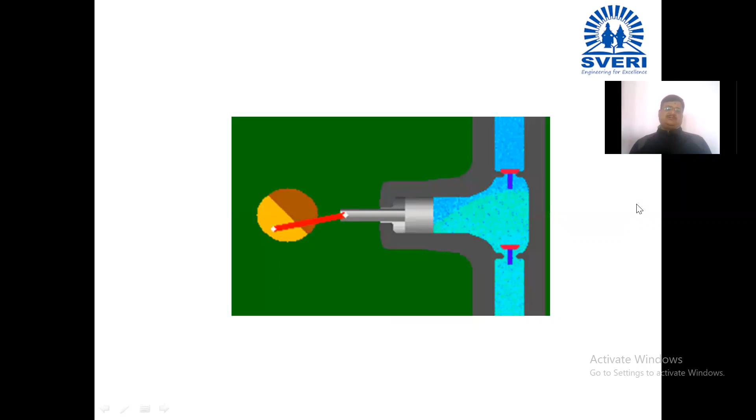In this unit 5, in the previous lecture we studied the single acting reciprocating pump. The diagram for this single acting reciprocating pump is in front of you. This was the block diagram. We have seen its working, shown also in the form of this animation.

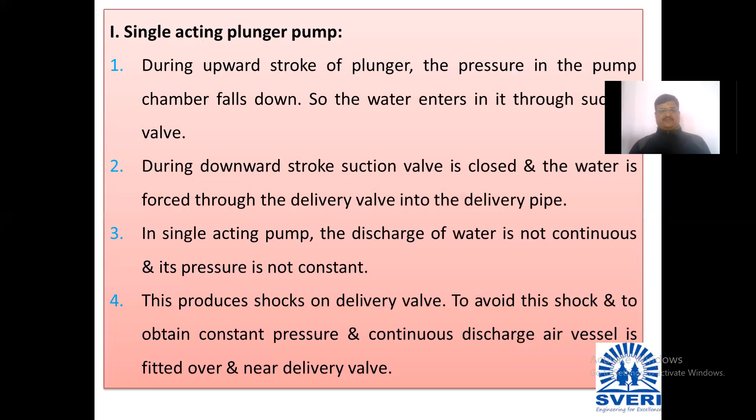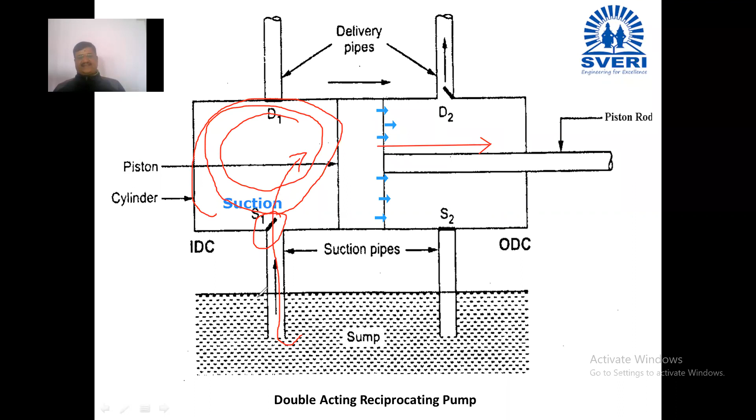S1 valve जो काही आहे तो ओपन होतो आणि त्याच वेळी सक्शन असल्या कारणानं D1 valve क्लोज होतो. Due to this suction, vacuum is generated and the liquid from the sump is taken inside, like single acting reciprocating pump. काय होतं?

ह्याच्यामध्ये संप मधून जे काही लिक्विड आहे ते आतमध्ये घेतलं जातं, ज्यावेळी तुमचं पिस्टन लेफ्ट टू राईट मूव्ह होतं. Means when your connecting pin is moving from IDC to ODC, piston is moving in the backward direction, suction stroke is carried out.

This is during the first stroke or suction stroke when your piston will move in a backward direction. मग बॅकवर्डला पिस्टन आल्यानंतर तो नंतर ओडीसी कडून आयडीसी कडे, आउटर डेड सेंटर कडून इनर डेड सेंटर कडे मूव्ह होणार आहे. Means your piston will start moving in a forward direction.

When your piston is going to start moving in forward direction, vacuum is going to be generated at the right hand side, and S2 valve will get open. D2 valve is going to close. S1 valve is going to close and D1 valve is going to get open.

आता पहा ज्यावेळी पिस्टन पुढे मूव्ह होतो तिथं आधीच लिक्विड भरून ठेवलेलं आहे ड्युरिंग सक्शन स्ट्रोक. Then piston is going to add energy to the liquid which is already there in this part of the cylinder.

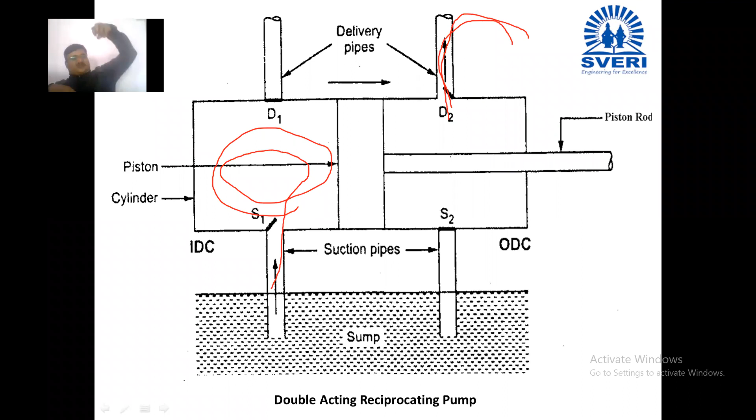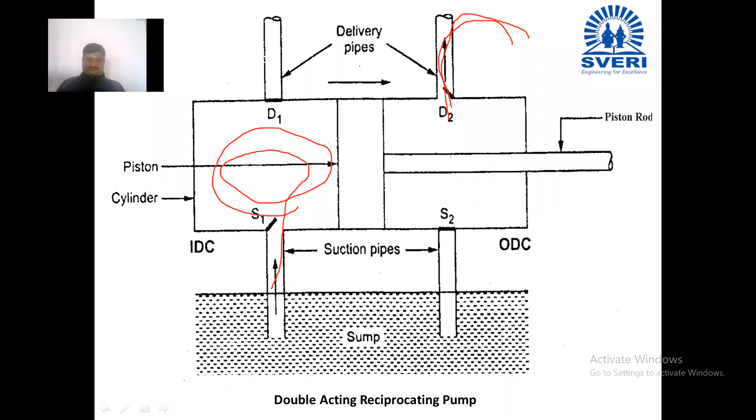But here in case of the double acting reciprocating pump, suction is also happening and simultaneously delivery is happening at another end, and the same process is repeated for the second pipe. म्हणजे एकाच वेळी सक्शन होतं एका भागामध्ये आणि दुसऱ्या भागातलं लिक्विड पिस्टनच्या बाहेर टाकलं जातं.

सिमिलरली ज्यावेळी पुढचा स्ट्रोक येतो त्यावेळी एका बाजूनं लिक्विड जे घेतलेलं आहे ते दुसऱ्या बाजूनं बाहेर टाकलं जातं. आणि लिक्विड आतमध्ये घेणं आणि बाहेर सोडणं हे क्रॉस मध्ये चालतं.

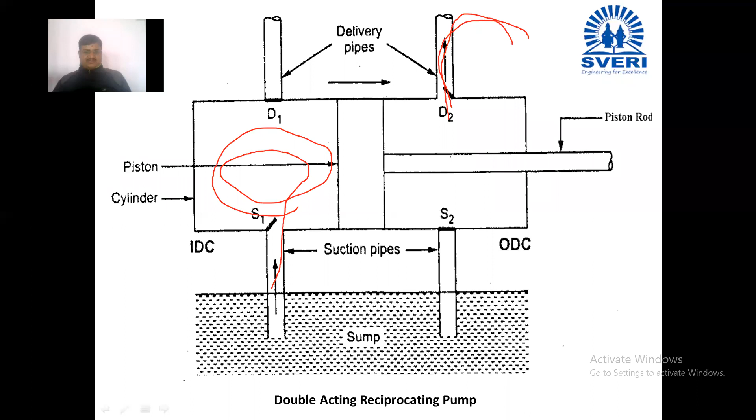Means when your S1 is open, your S2 is closed and D2 is going to get open. And when your S2 is going to get open, then your D1 will open. Now here you can see that S1 and D2 are open.

म्हणजे एका बाजूला सक्शन होतंय तर दुसऱ्या बाजूमधून लिक्विड बाहेर काढलं जातं. आणि इकडच्या बाजूला ज्यावेळी हा स्ट्रोक फॉरवर्ड डायरेक्शन मध्ये जाईल त्यावेळी S2 valve is getting open and similarly D1 valve is also getting open. At that time S1 valve will be closed and D2 valve is also going to be closed.

म्हणजे क्रॉस मध्ये जे काही वॉल्स आहेत हे उघडतात आणि continuously high pressurized liquid supply we can get by using this double acting reciprocating pump.

Now what is the basic difference between single acting reciprocating pump and double acting reciprocating pump? Can anybody tell me what is the basic difference between them?

In construction, double suction pipes and delivery pipes are used. Two suction only pipes and two delivery pipes are used. Okay, yes, good. Can anybody tell me what is the valve situation during suction and delivery stroke of the piston?

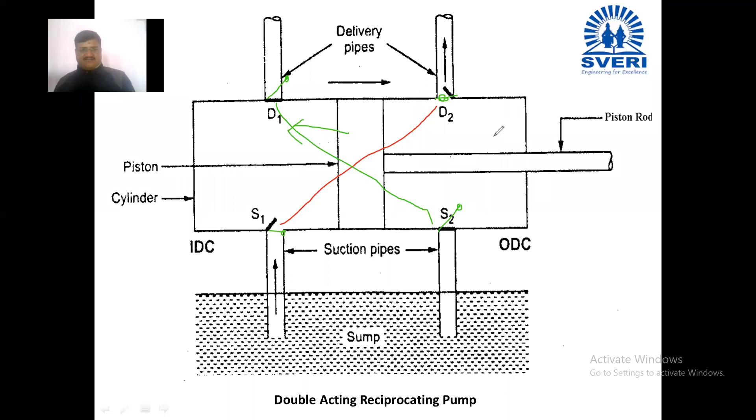So the construction is understood by you and its working is also understood. Simple working is there. Here at both sides of the piston, meaning left side as well as right side of the piston in the cylinder,

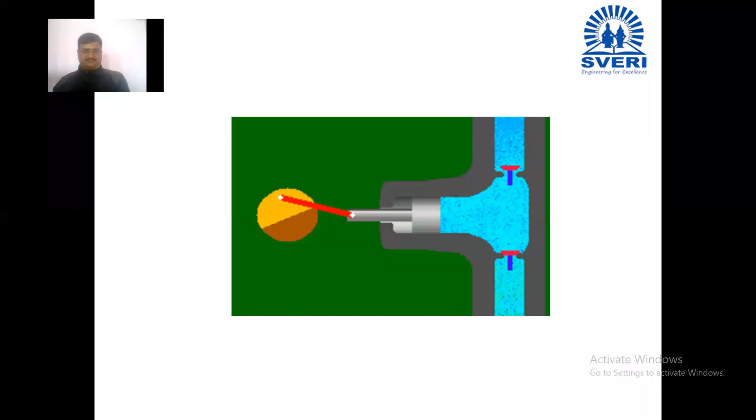You just see - in case of the single acting reciprocating pump, here the liquid is taken only at one side. If you see, you will come to know that in this diagram, liquid comes from here up to this point and again goes out from here. So to the right side of the piston, there is no liquid.

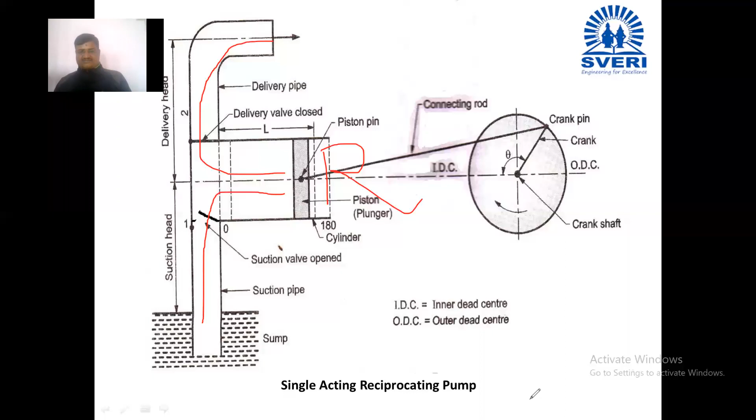But in case of this double acting reciprocating pump, you can see at both sides of the piston, that is in the left hand side and in the right hand side, you can take the liquid inside and you can deliver it to the outside.

Okay, yes. So just we are going to concentrate on the application of this particular double acting reciprocating pump. I can tell you the speciality of the reciprocating pump - they can provide the liquid at another end with higher pressure.

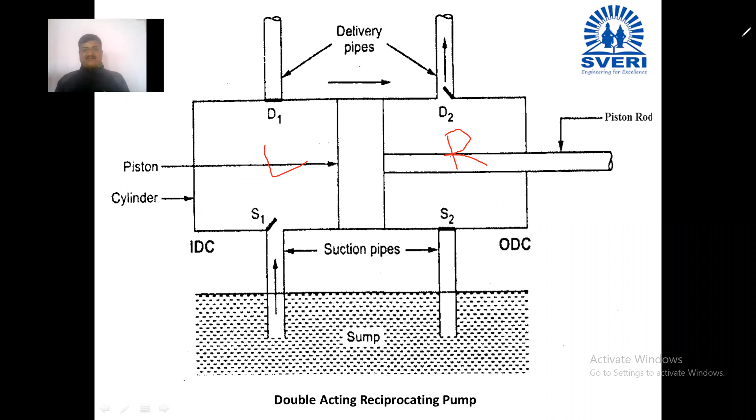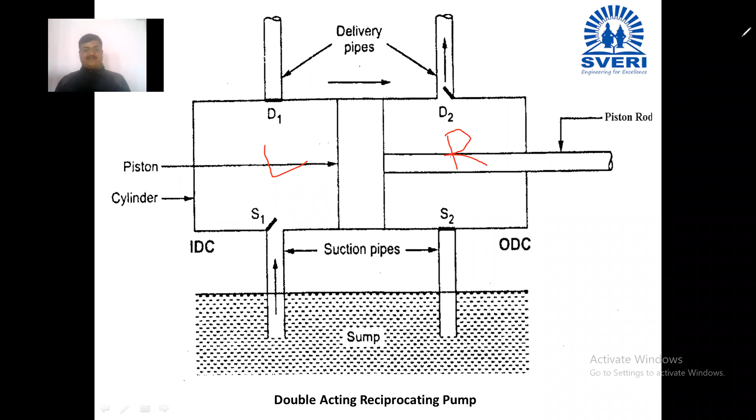We are going to concentrate on the double acting reciprocating pump, but before that, please draw this diagram of the double acting reciprocating pump in your notebook. This diagram of the double acting reciprocating pump, copy it into your notebook. Simple diagram. Okay, your time starts now. Are you ready? Are you drawing it?

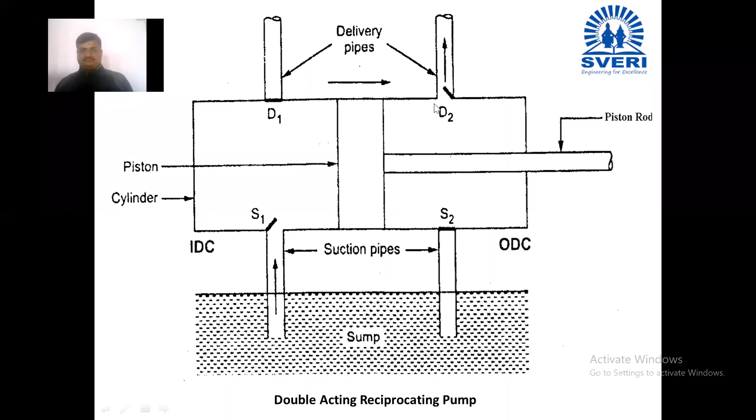Have you completed it? Yes sir, yes sir, yes sir. So the application of the reciprocating pump is the next part of our discussion.

Reciprocating pumps are there, but where do we need to use it? So here the answer is given - the reciprocating pumps are widely used for very high pressure head of the water.

You want your water with higher pressure - I need more pressure for the water, meaning it can go to a larger distance. At that time, such reciprocating pumps are widely used, when I need high pressure liquid, water, at that time I will use the reciprocating pump.

Because you must know that this is a pump, I have studied it, what a reciprocating pump is, how it functions, how single acting works, how double acting works. I know everything, but where do I need to apply it?

So you need to apply the reciprocating pump where you require high pressure. Then, though they are providing high pressure, they are giving small discharge.

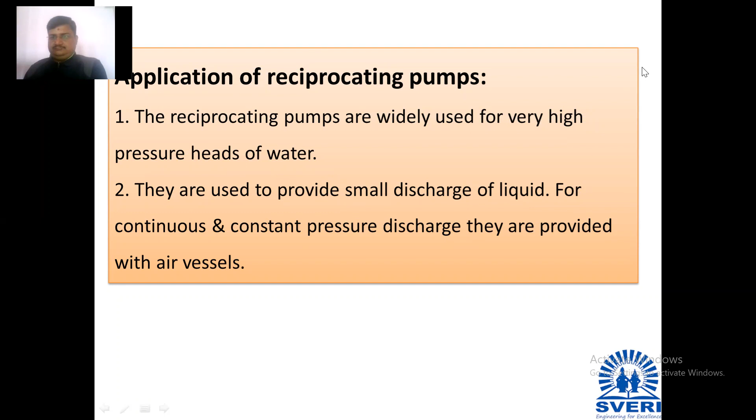Now, the next type of pump is the variety of rotodynamic pump. And in rotodynamic pump, there are two types. Which are those two types? Can anybody tell me? Rotodynamic pump - radial flow pump and axial flow pump. Yes, radial type flow pump and axial type flow pump. And this centrifugal pump is an example of radial type of flow pump.

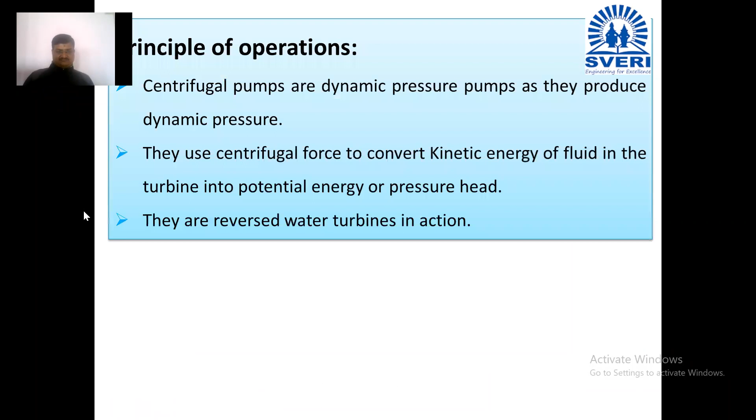जेव्हा इम्पेलर फिरतो, सेंट्रिफ्युगल फोर्सच्या कारणाने सेंटरला जोडलेला पाईप, जो इम्पेलरच्या आयला जोडलेला असतो (आय म्हणजे डोळा, इम्पेलरला एक आय असते), त्या ठिकाणी व्हॅक्यूम जनरेट होतं, आणि संपमधलं लिक्विड ती व्हॅक्यूमची स्पेस ऑक्युपाय करण्यासाठी वर वर पाईपकडे चढत जातं.

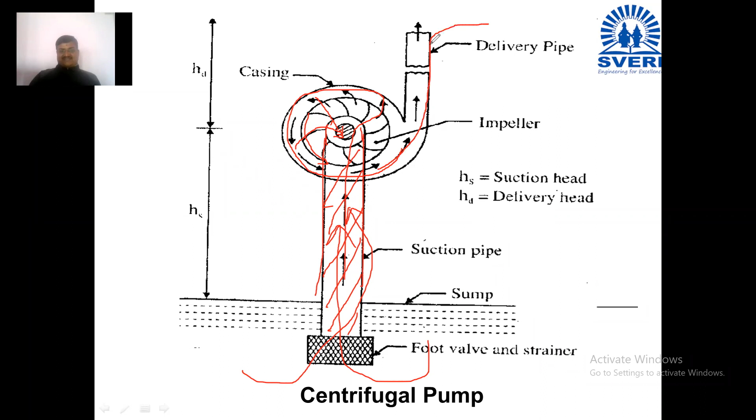ते पाईपमधून इम्पेलरकडे येतं, आणि इम्पेलरच्या व्हेनमधून ते पाणी बाहेर टाकलं जातं. बाहेर टाकत असताना ते सर्क्युलर मोशनमध्ये कायनेटिक एनर्जी घेऊन बाहेर पडतं, त्याला डायरेक्शन दिली जाते आणि डिलिव्हरी पाईपमधून ते पाणी बाहेर पडतं. अशा पद्धतीने सेंट्रिफ्युगल पंपचं मेकॅनिझम वर्क करत असतं.

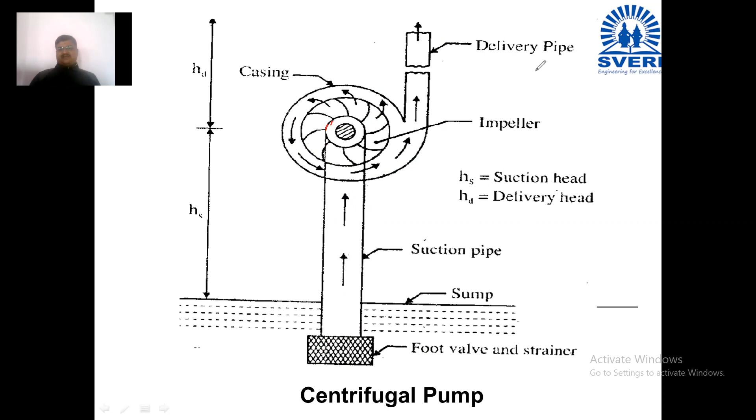But right now we are looking towards just the impeller. This impeller is fitted at the center, and this impeller generates the vacuum due to centrifugal action, and that vacuum is responsible to get the water in the suction pipe, and through the suction pipe it is reaching towards the casing. That is the work of the impeller.

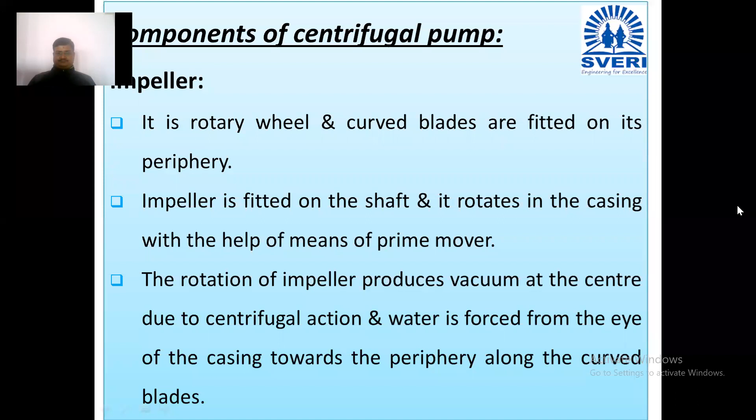Now the next part is the casing. What do you mean by casing? The shaft of the impeller is supported in the bearing provided in the casing. जे काही शाफ्ट आहे त्याला एका बेअरिंगने सपोर्ट केलेलं असतं. Have you seen the bearing? आपल्या सायकलच्या मागच्या व्हीलमध्ये बॉल्स बसवलेले असतात, तो बॉल बेअरिंगचा पार्ट.

बेअरिंग म्हणजे एक सर्क्युलर अशा पद्धतीचं अरेंजमेंट असतं. सो आय वॉन्ट टू शो यू द बेअरिंग. जस्ट अ मिनिट.

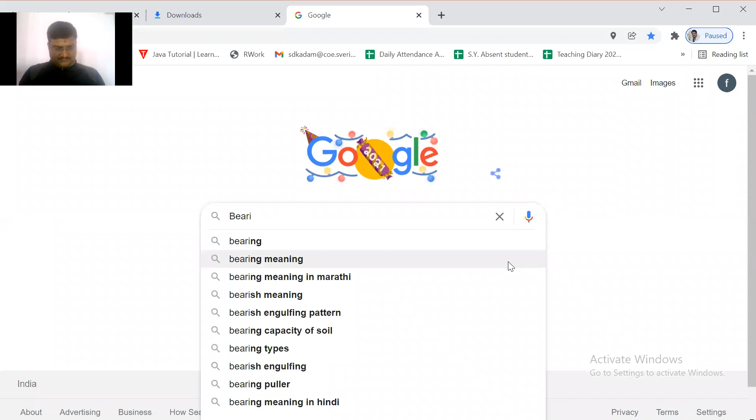So this is the bearing. Have you seen such kind of arrangement before? This is called the ball bearing. Let me show you the bigger photo. Have you seen such kind of arrangement? Yes sir, yes sir.

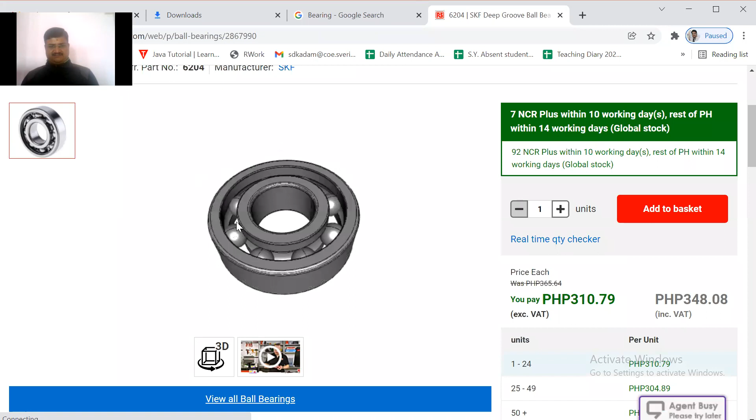तर या बेअरिंगच्या मध्ये सेंटरला शाफ्ट दाखवलेला, सेंटरला होल दाखवलेला आहे. सी दिस इज द 3 डायमेन्शनल रोटेशन्स, आणि इथं सेंटरला ही स्पेस आहे. या सेंटरच्या स्पेसमध्ये शाफ्ट टाकलेला असतो, आणि याच्यावरून बाहेरच्या पेरिफेरीवरून बेल्ट अरेंजमेंट करून हा शाफ्ट फिरवण्याची मेकॅनिझम डेव्हलप केली जाते.

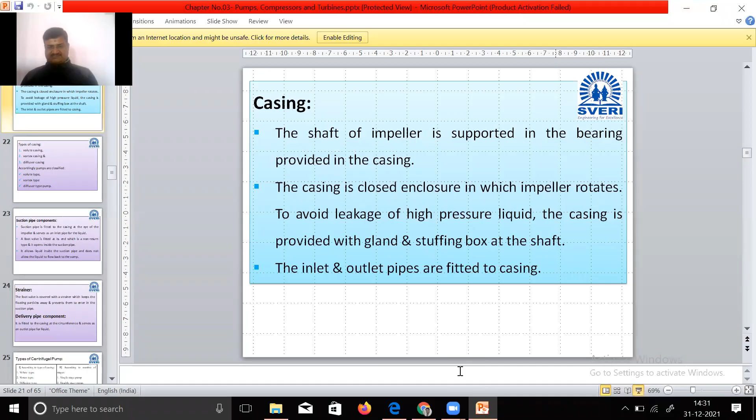सो दिस इज द बेअरिंग. ओके, just for your extra information, that part I am telling you.

And this casing is the enclosure in which the impeller rotates. थोडक्यात केसिंग म्हणजे कव्हर आहे, and inside that cover your impeller is rotating. तुम्ही बघितलेलं आहे, पंपला एक कव्हरिंग असतं, दॅट कव्हरिंग इज कॉल्ड द केसिंग. त्या कव्हरिंगला केसिंग म्हणतात.

And this particular casing is provided to avoid the leakage of high pressure liquid. नाहीतर प्रेशर ड्रॉप जनरेट होईल तिथं. जर खालून आलेलं प्रेशराइज्ड लिक्विड एका चॅनलाइज्ड क्लोज्ड वेमध्ये घेऊन गेलं नाही, तर त्या फंक्शनिंगचा काही उपयोग राहणार नाही. एवढ्या हाय प्रेशरने ते वर आणायचं आणि कव्हर नसेल, साईडने लिकेज होत असेल, तर ते प्रेशर मेंटेन होणार नाही.

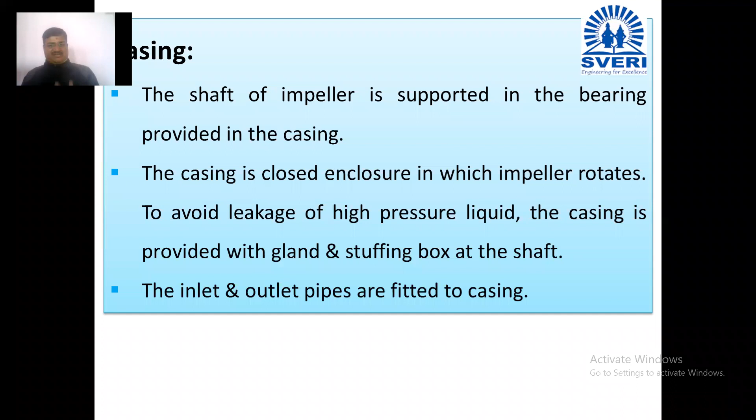So that inlet and outlet pipes we are fitting to the casing, and casing is the cover. म्हणजे केसिंगमधून लिक्विड आत किंवा बाहेर येण्यासाठी फक्त दोन मार्ग आहेत. जे पाणी आत घेण्यासाठी आहे दॅट इज नोन एज द सक्शन पाईप, आणि जे पाणी बाहेर पाठवण्यासाठी आहे दॅट इज नोन एज द डिलिव्हरी पाईप. So casing is nothing but the shell, the cover provided to the impeller mechanism of your centrifugal pump, and it avoids leakage of high pressure liquid. That part you will have to keep in mind.

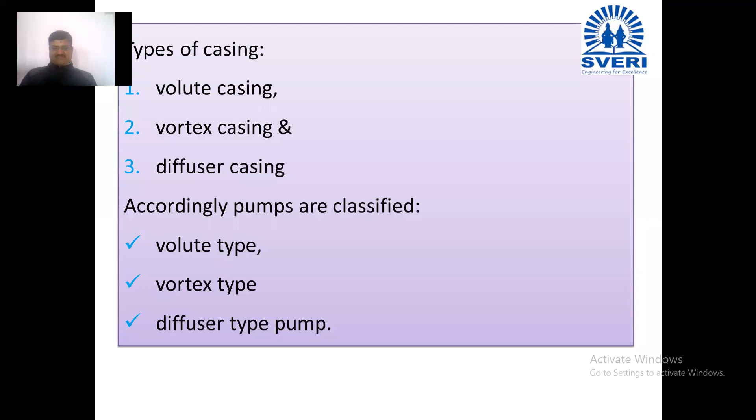Then the suction pipe component. Here in the suction pipe component, three components are there: first one is the suction pipe, second one is the foot valve, and third one is the strainer. Now you will have to tell me why the suction pipe is utilized.

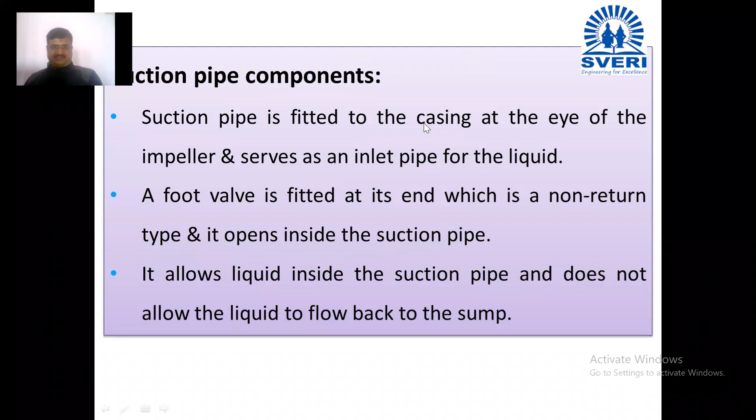So we have seen suction pipe components. Here the information about the strainer and delivery pipe is provided.

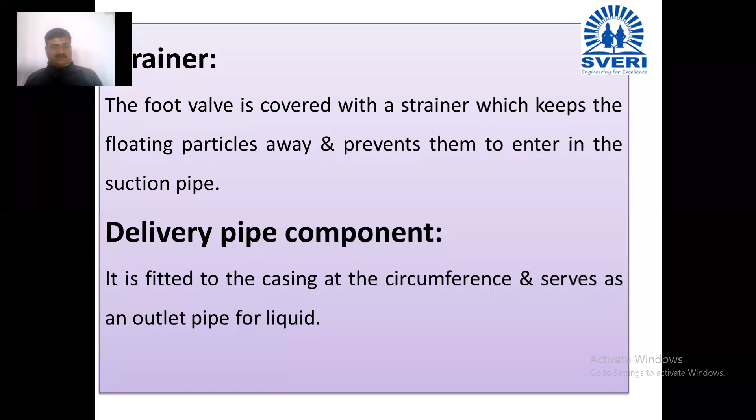There are types of centrifugal pump. I have discussed it, no need to go for further classification. Whatever classification I have given at the beginning is sufficient, but this is for your additional knowledge.

According to the type of casing, I have already discussed volute, vortex, and diffuser type centrifugal pump. And according to the number of stages, single stage, double stage - how it works is like this.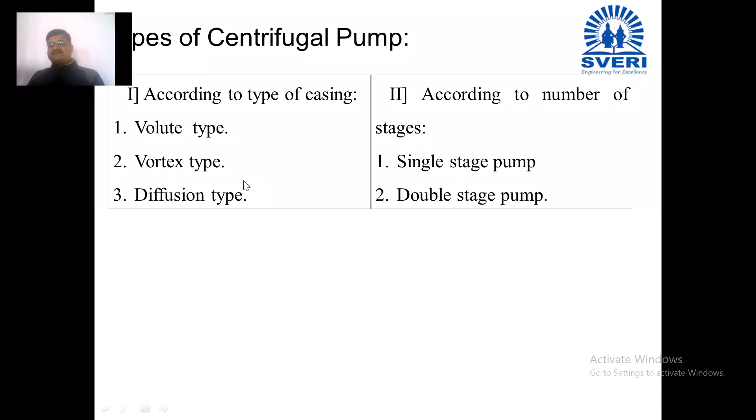So there is a multi-stage centrifugal pump also and single-stage centrifugal pump also. And here are the applications of the centrifugal pump - where the centrifugal pump is utilized.

See, reciprocating pumps are providing very small discharge, but centrifugal pumps are providing large discharge. Such kind of pumps are widely used because these are compact in size.

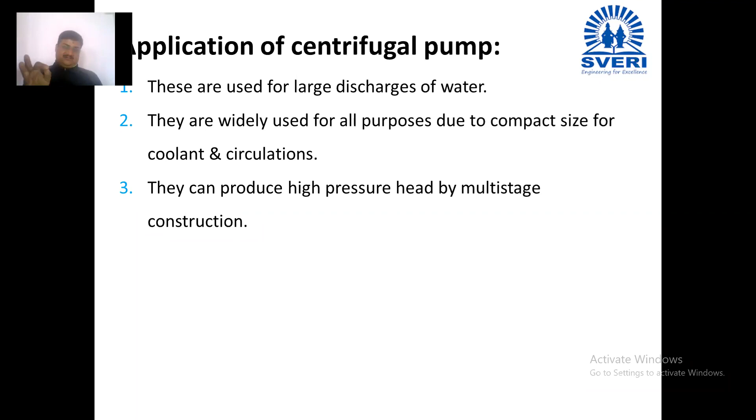Okay, now before moving to this particular centrifugal pump, I want to show you how exactly the centrifugal pump works.

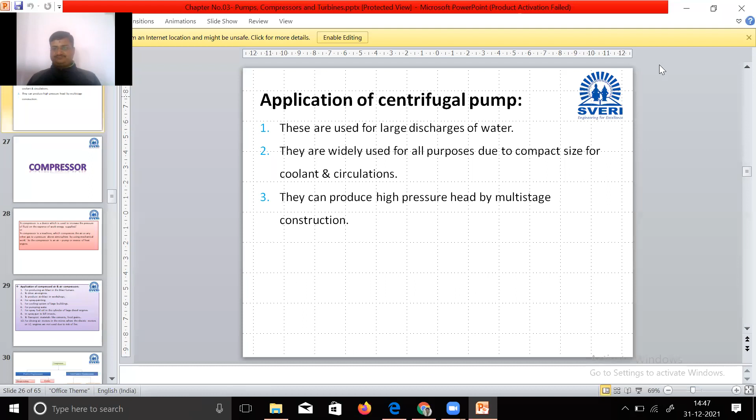Conceptual overview of working of centrifugal pumps. Can you listen? Yes sir, yes sir, yes sir. Yes sir, the parts they are indicating.

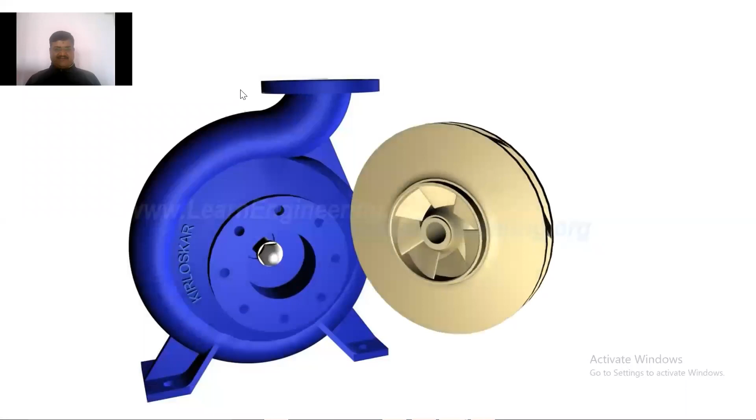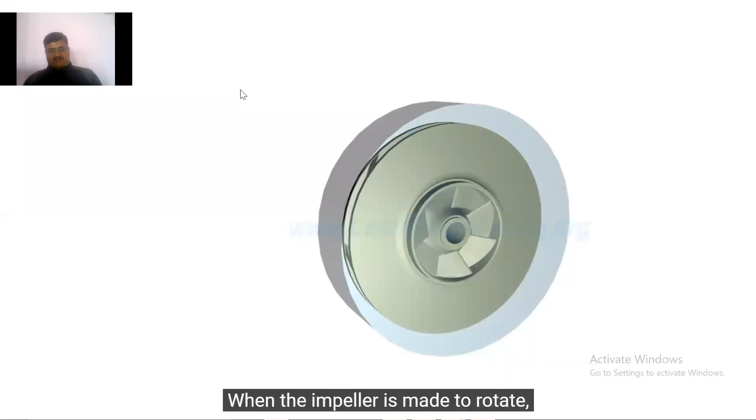It has got a series of curved vanes fitted inside the impeller with shroud plates. See the impeller structure - the impeller is always immersed in water. When the impeller is made to rotate, the fluids surrounding it also rotate.

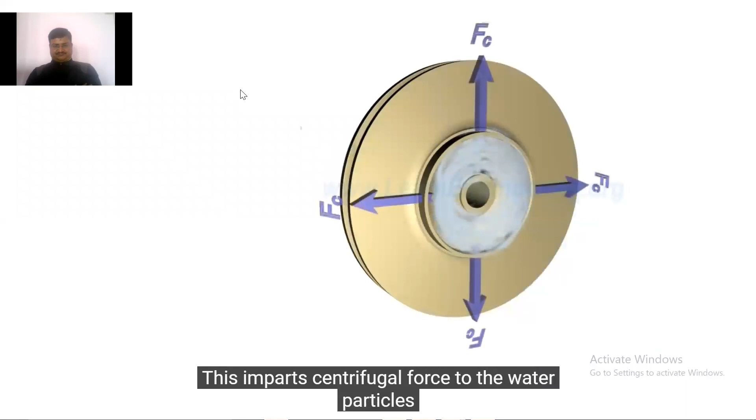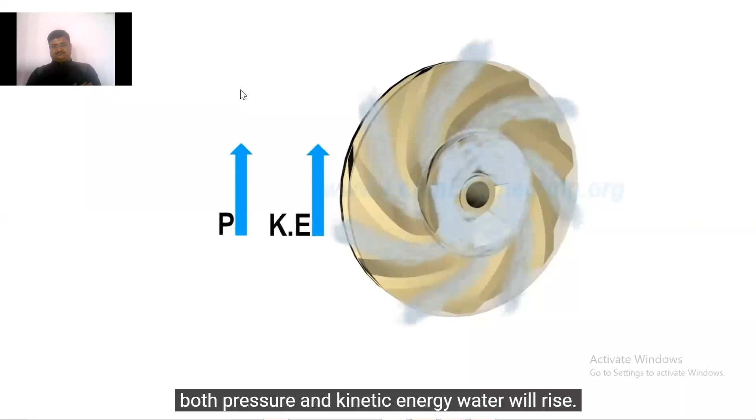It imparts centrifugal force to the water particles, and the water moves radially out. Since rotational mechanical energy is transferred to the fluid, at the discharge side of the impeller, both pressure and kinetic energy of water will rise.

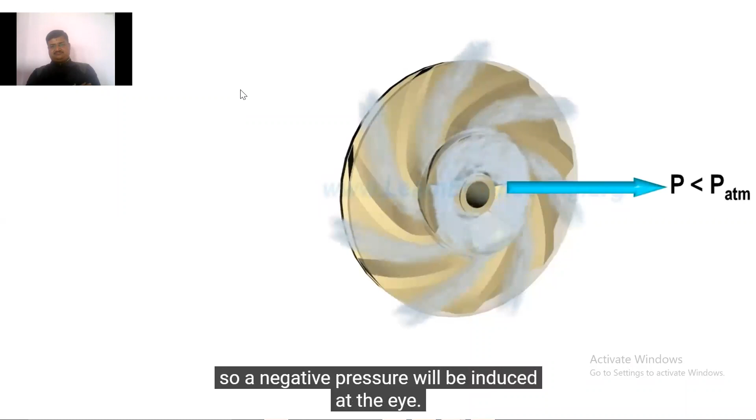At the suction side, water is getting displaced, so a negative pressure is induced at the eye of the impeller. Such low pressure helps in sucking a fresh stream of water into the system, and this process of sucking water through the suction pipe continues.

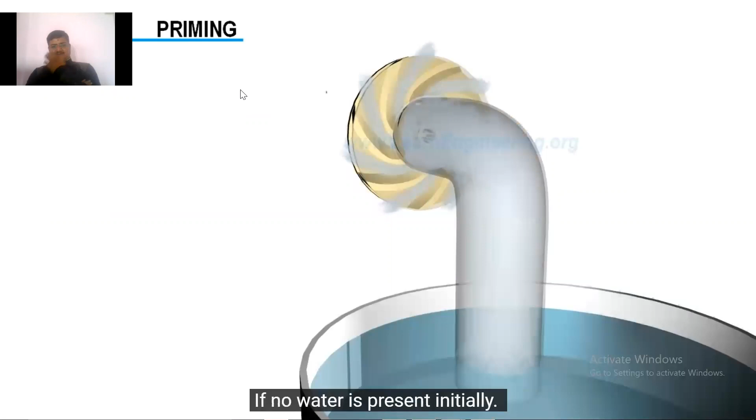This is the reason why priming is important for centrifugal pumps. If no water is present initially, the negative pressure developed by rotating air at the eye of the impeller will be negligibly small to suck a fresh stream of water - we are going to study this concept in the next lecture.

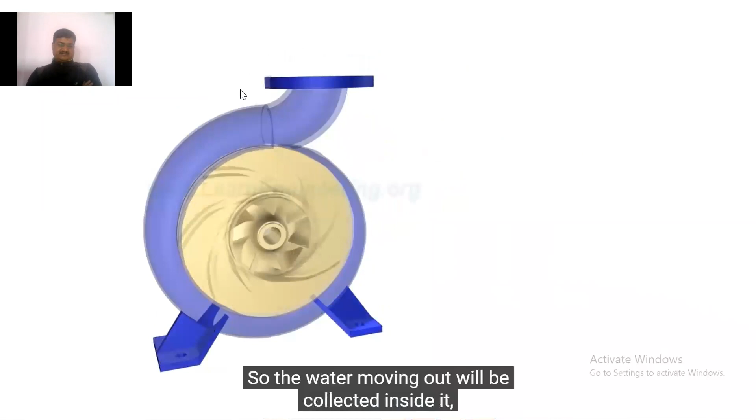Impeller is fitted inside a casing. See, this is the casing, and inside that casing the impeller is fitted. Water enters through suction, gets collected, and moves in the same direction of rotation of the impeller to the discharge nozzle.

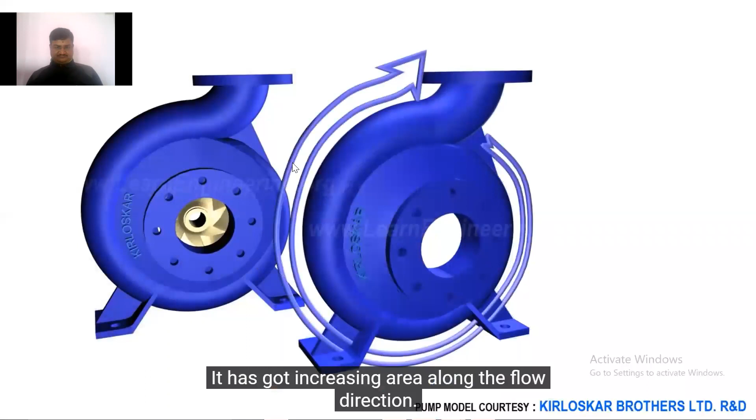Water is taken inside here. Here you can note one specialty of the casing: water is coming out, and it has got increasing area along the flow direction. Such increasing area helps in accommodating the newly added water stream and also helps in reducing exit flow velocity. Reduction in flow velocity results in increase in static pressure, which is required to overcome resistance of the pumping system.

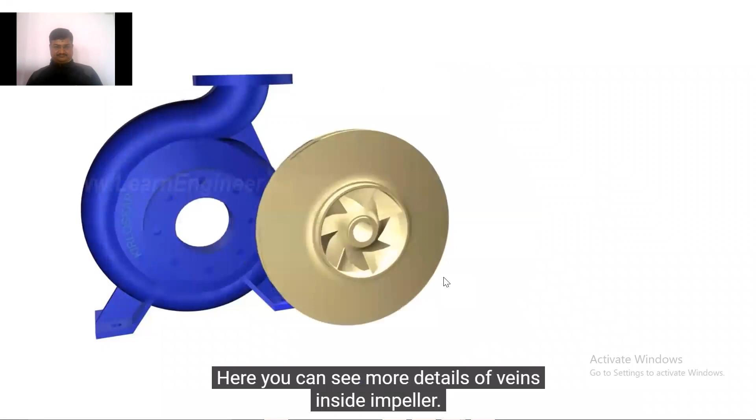Here you can see more details of vanes inside the impeller. They are backward curved vanes with a state-of-the-art eye configuration. This vane is extracted from a Kirloskar pump model.

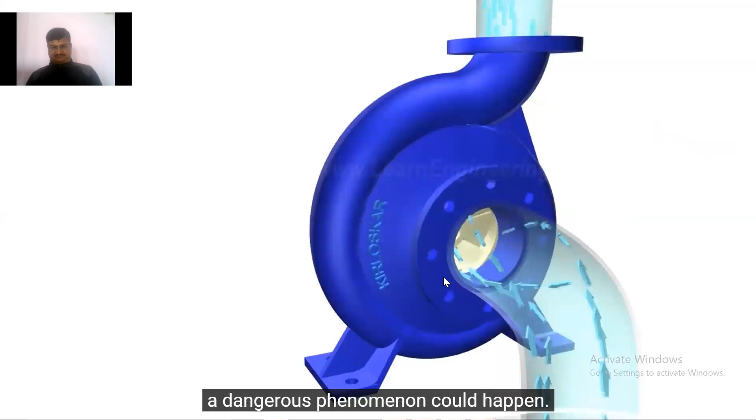If pressure at the suction side of the impeller goes below vapor pressure of water, a dangerous phenomenon could happen. Water will start to boil, forming vapor bubbles and spoiling impeller materials over time. This phenomenon is known as cavitation. The more the suction head, the lesser should be the pressure at the suction side to lift water.

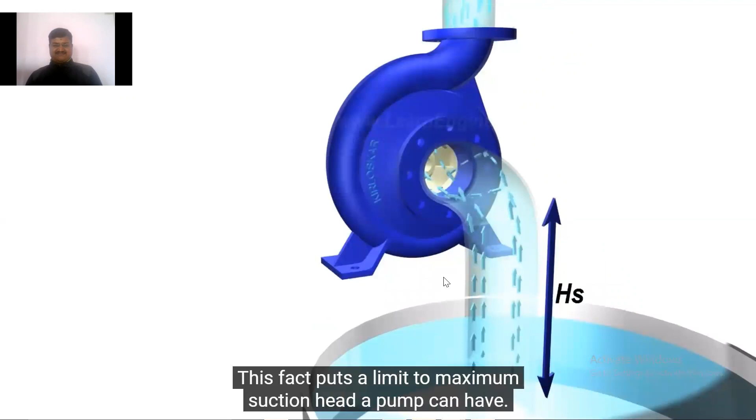This fact puts a limit to the maximum suction head a pump can have. Careful pump selection is required to avoid the problem of cavitation. And on that suction head, there is a delivery head.

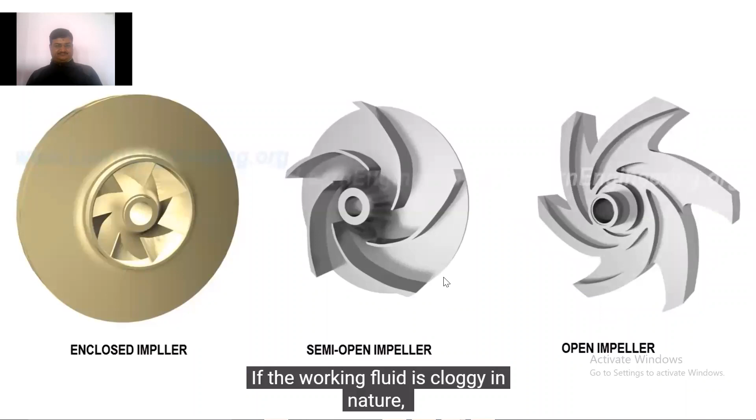Current impeller type is enclosed. Semi-open and open impellers are also in use depending upon application. If the working fluid is cloggy in nature, semi-open and open kinds of impellers are preferred, but they are slightly less efficient.

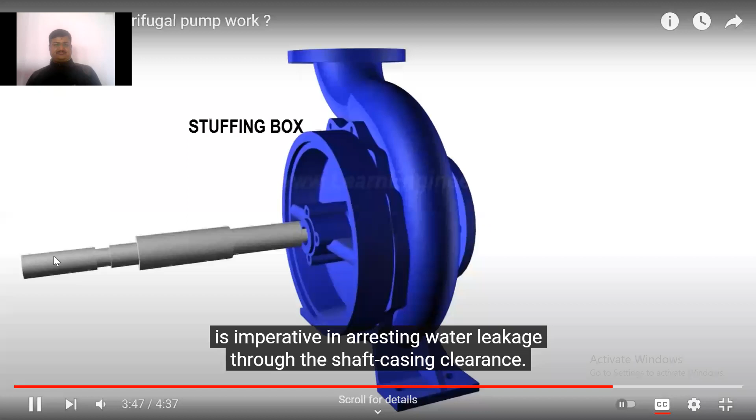It is always challenging. Since water pressure inside the casing is huge, proper shaft sealing arrangement is imperative in arresting water leakage through the clearance from casing to prime mover outside. Mechanical seal or stuffing box-based mechanism is used for this purpose. See how the different parts are fitted to it.

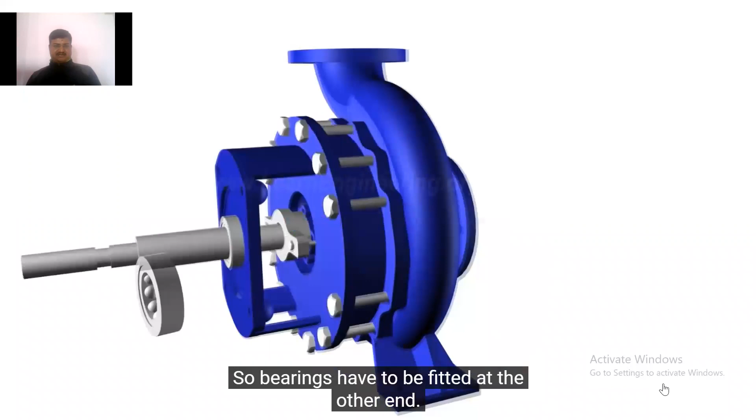The impeller is mounted on bearings, but at the suction side of the impeller it is not advisable to have a bearing fitted; it is fitted at the other end. This is the bearing I have shown you. See, the impeller is mounted like a cantilever.

For high flow rate pumps, a bearing housing with cooling oil is necessary for improving the life of bearings.

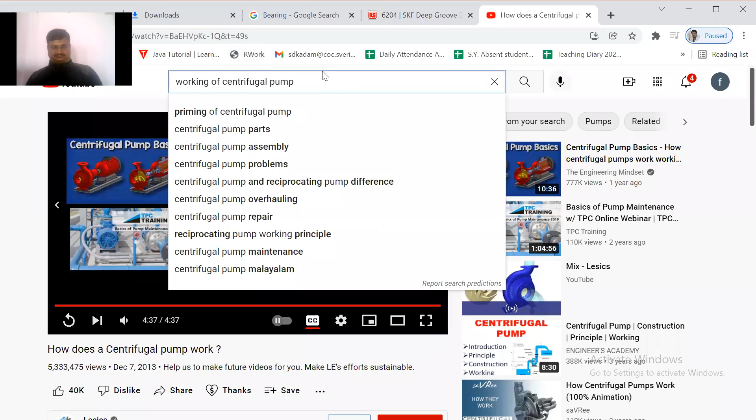So many such kinds of videos are available on how a centrifugal pump works. You can check them out. A simple working is shown over here. I just want to show it to you, and here is the diagram with the details.

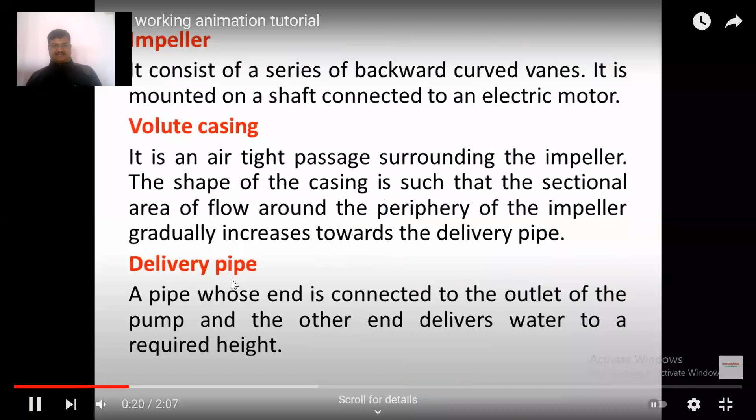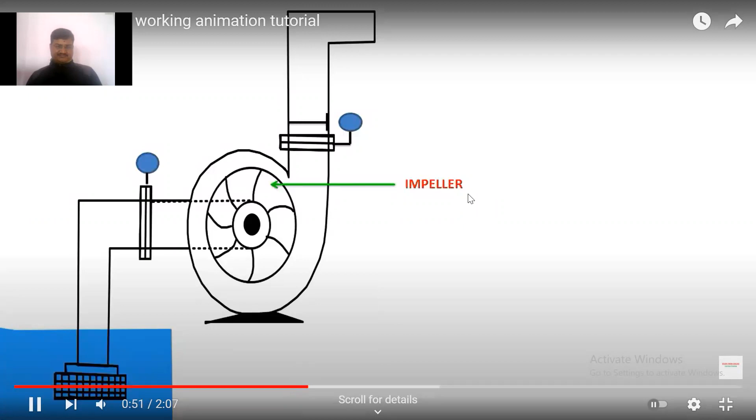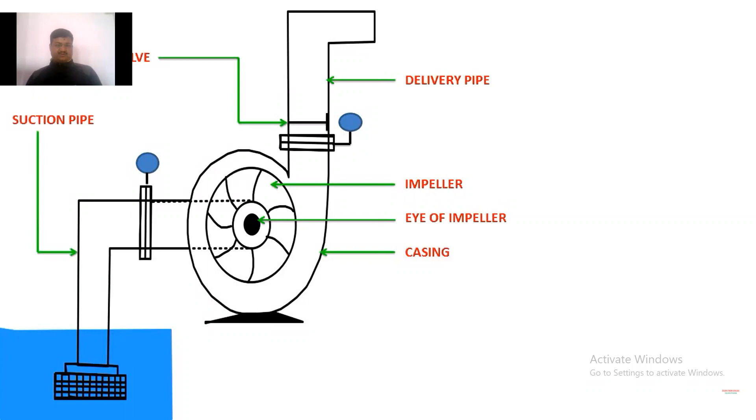This is the impeller, eye of the impeller, casing, delivery pipe, valve, suction pipe, foot valve with strainer, sump, and then the vacuum gauge to adjust the vacuum.

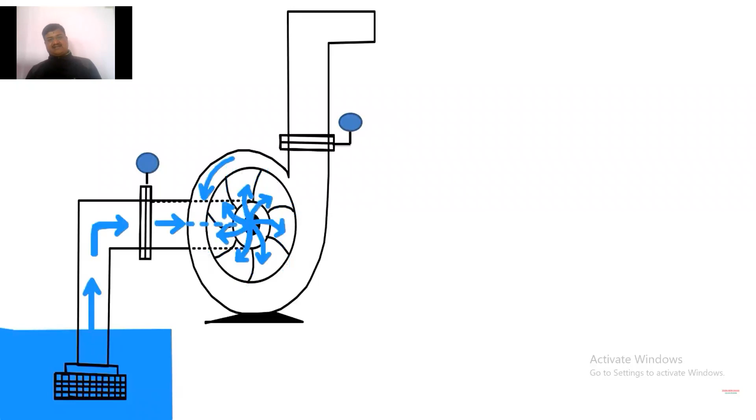And that liquid in the casing is coming out through the delivery pipe.